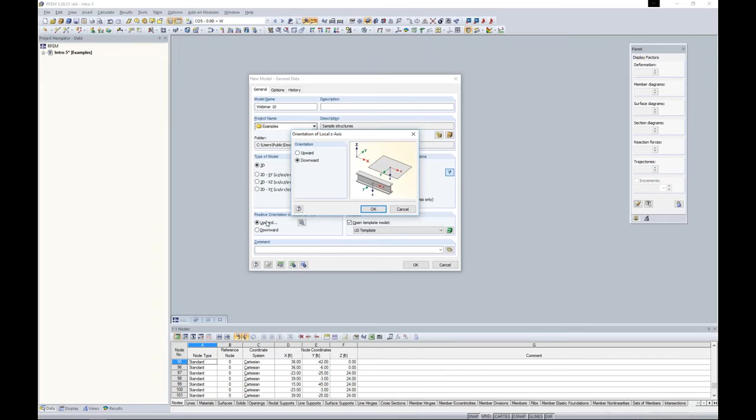The orientation of the global z-axis by default is set to upward for the United States install. That's typically what we work with here. And under this details, we'll want to make sure that our local z-axis is set to downward. This is more so important for concrete design. Otherwise, it really doesn't matter in the program. But I always suggest if you have the global z-axis upward to set this as downward for our local member axis.

Over here, we have the Create Combinations Automatically checked on. So when this is checked on, this is telling the program to automatically create these load combinations according to a specific standard that I select here in my dropdown. And this is where you can see that we have the ASCE 7 load combinations, IBC, we have the Canadian standard, as well as Eurocode and several other international standards. When I have this checked off, then I can manually create those load combinations. They won't be automatically created for me according to the specific standard.

The template model down here is important because I think it's a very beneficial option. For me, I have this US template, and this just has the grid settings set up the way that I like, maybe my units. Perhaps I have some certain materials and cross sections that I use quite often. Well, once I'm in RFEM, I can always go to File, Save as Template, and then that template will be available in this drop-down here. This is great for companies who maybe do a lot of similar structures and all start off with the basic type structure to begin with. Well, you can model that basic structure and pull that up in your template model every time and then make further changes. So now we're ready to jump into the program.

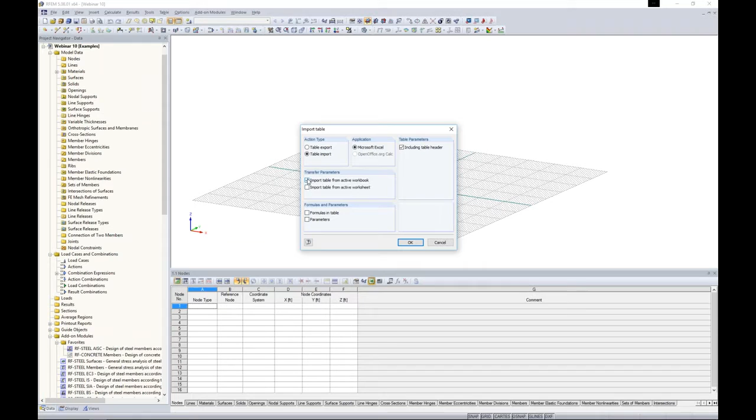So when we first open up the model here, we have our graphics view located in the center of the screen. So as we begin to draw elements within the model, this is where they will begin to appear. Down at the bottom, we have all of our tables. A lot of engineers prefer to work with the tables, and you can certainly build an entire structure within these tables as well. What is great about the tables is that we have a nice button here for export and import table directly to and from Microsoft Excel. So you can copy and paste, but realistically this is a little bit more user-friendly. For example, we can export this table for our nodes to get the basic layout with all of the correct columns. We can input our data in Microsoft Excel, maybe sort some different ways, and then we can import directly from Excel according to the active workbook and worksheet that maybe we're in the background.

A few other options that we have for modeling are, of course, all of our little tools up here, which we'll be using quite often today. We have our drop-down box up here. For example, we have all of the add-on modules listed according to the different categories, such as steel, concrete, dynamics.

We also have the Project Navigator, and the Project Navigator is just another option to input your data. We will also view our results in the Project Navigator. So this first tab down here called Data, this would be all of our input data, and here is our long list of add-on modules here.

So you can understand that we serve our customers the add-on module concept because we really want to create a software that's catered to you and your needs, rather than, hey, we need to charge you a very expensive software and you get all of these add-on modules regardless if you're going to use them or not. For example, you can see all of the different international steel codes that we have here that probably most of the time users aren't going to be utilizing. So, as I mentioned, a very long add-on module list.

The display tab really controls everything that we're viewing graphically here, including our results after we run an analysis, as well as the input data. Our views tab, it looks pretty empty right now, but as we begin to generate our structure, this will allow you as a user to create user-defined views, to view certain materials and sections quickly, rather than having to highlight and select them graphically.

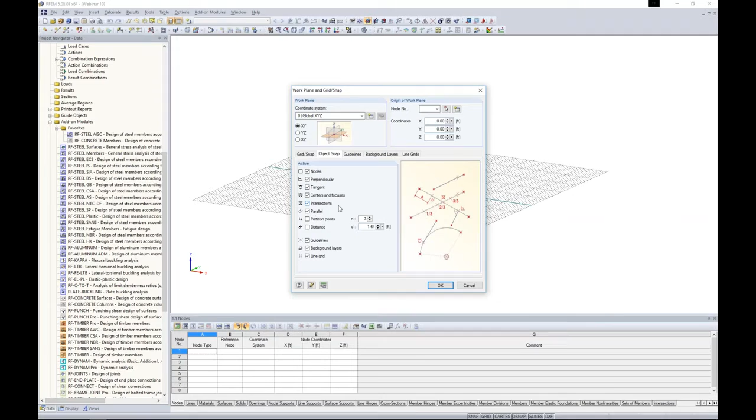And this is the reason sometimes I tell users you're almost better off just starting modeling in our program rather than importing in a DXF file, because it's easier that way, because of all these different tools that we have. But with that said, you can import DXF files too. For example, under the background layers tab is where we can import in this DXF. And what's nice about the different background layers is I can put multiple layers in here. So maybe I have a different layout for every level of a multi-story building. Well, I can go ahead and import in that DXF file at multiple elevations.

The line grids option. If I create a new line grid here, you'll notice in the background that we have our typical 2D layout of our project grid. Well, this allows us to do a 3D project grid. Down here at the bottom, you'll notice some different options that we have. For example, Cartesian, which is maybe more of a square, rectangular, 3D drawing grid. But we also have spherical, cylindrical, and inclined. So this really plays an important factor, again, for these not so simple geometries that you may have, where you have different snap points in a 3D type environment that you'd like to utilize. Well, that's where these line grids may come in handy.

Under the grid snap settings, well, this is my current grid that I'm viewing here. Default when you launch the program is this rectangular grid, but we can change this to polar if we'd like, if we're working with a circular type structure. And right now for Cartesian, I have 50 feet on either side of my origin, but I can also check this checkbox so that the project grid will actually grow with the structure, so it'll move dynamically according to the size of the model. Or if I shrink my structure down, that project grid will shrink down too, so I'm not always having to go back in here and change my settings to something bigger or smaller.

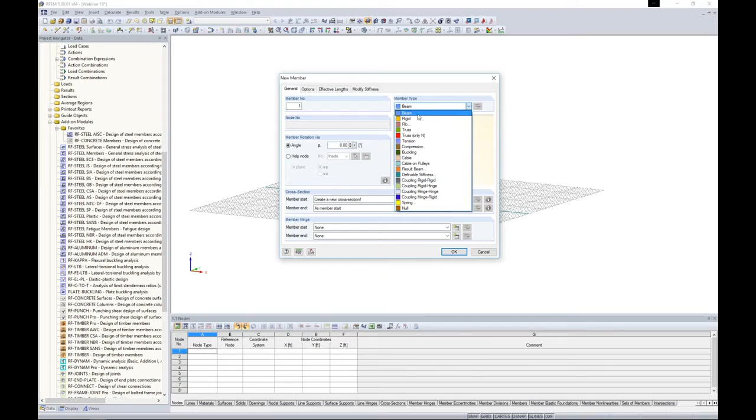And then because of our nonlinear capabilities, we can do things like cables or cables on pulleys. We can get into spring elements. So quite a few other options than just your typical application of a beam or a column.

But with that said, we will choose the member type beam and we'll create a new cross section. Launching our cross section library, you'll notice that we have our rolled sections where you'll find all of the sections from the CSA code, the AISC code, maybe aluminum sections from the ADM. These are all available in our cross section library.

But we also have these parametric thin-walled sections. We have massive sections for concrete. So you'll notice maybe in some other software you're really left with only a rectangular or circular type application for cross section.

But here we can utilize things like I sections, T sections, same with timber sections here. And we can even get into built-up type members. So we're not limited to just those sections directly from the codes, but we can really utilize a wide array of cross-sections here.

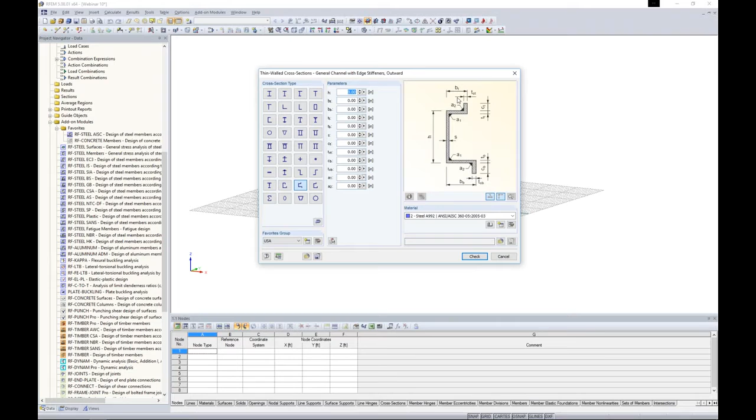For example, if I have an odd thin-walled cross-section here, all I need to do is to define my geometry, and then the program will automatically calculate the section properties for me.

We also have two standalone programs called Shape Thin and Shape Massive, and this is where you can import in a Dxf file, for example, and that will calculate the section properties for you, and then we can import them directly into RFEM. Those are standalone programs.

For today, we will go with a typical I section, and here is where we can use our filters on the left-hand side. From the first drop-down, you'll see that we have many different standards here. So that's great. If you do a lot of international projects, you'll have access to all these as well in RFEM. This is independent of any add-on modules.

Today, we'll be working with the AISC, and we want to first choose our W shape. Now, we have this long list of W shapes, which just comes directly from the AISC 14. But perhaps you use a lot of the same sections and you don't really want to scroll through this long list every time to choose your specific W shape.

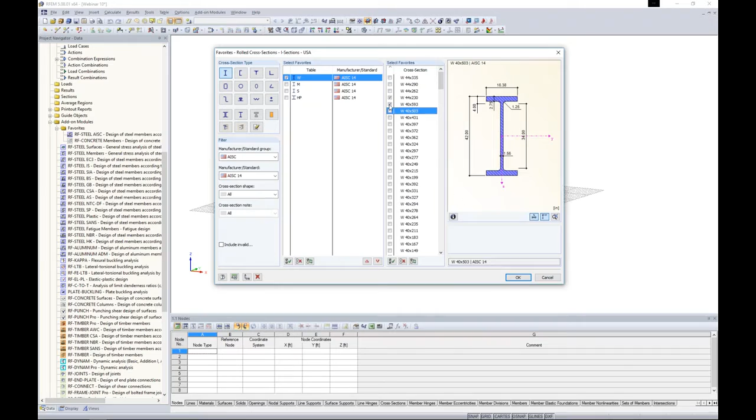Well, this is where we can utilize our favorites group. With a favorites group, and I choose my edit button here, I can simply check on or check off maybe a set of sections that I use quite often. Then when I click OK and I activate this favorites group, then I'll have these sections available from a quicker list than having to sift through everything.

For today's example, I added a couple W shapes that I know I'm going to be using for this example. So now I have quick access to them.

We can also set the material in the same dialog box. You'll notice in this drop-down menu, the default when you open up RFEM is concrete F'C 4000, and we have steel A992. So for right now, we'll just utilize the default material in the program, but later on we'll have to add in some more materials to that.

The member hinge is set at fully fixed. So right now we will not add in any member hinge, but later on we will do this as well.

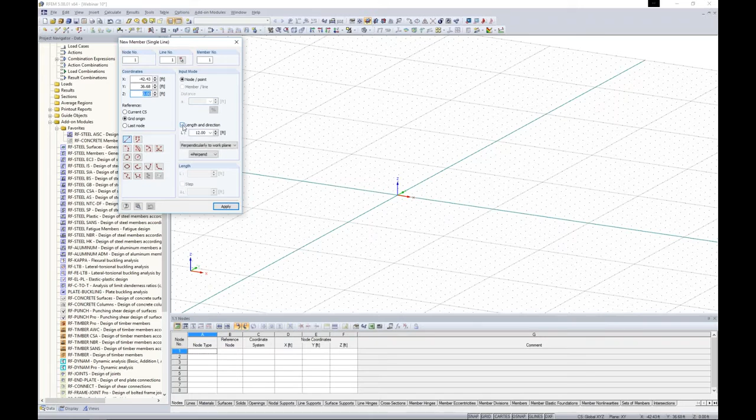So now I'm ready to draw my first member. Well, typically when drawing the member, we need to change maybe our drawing grid and maybe snap to a couple different points. But another useful feature with this dialog box when I'm drawing a new member is to simply specify the length and the direction. So I can set the length to 12 feet here, and I want to draw it perpendicular to my work plane. So my work plane is set in the global X-Y axis. All I need to do is just to click on a couple points here to draw in my first columns. And now you'll notice that the orientation is in the correct direction and my length is set correctly too with that useful feature.

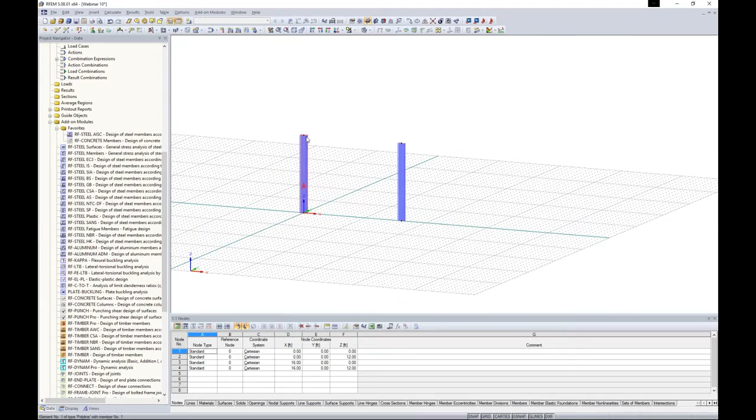The next thing to do is to draw a beam member connecting our two columns. So again, I'm just going to go to my Draw New Beam. I'm going to create a new cross-section. And once again, choosing a rolled cross-section under my favorites list, I'm going to choose a W12 by 40.

And I just noticed I used a W12 by 40 here. That's okay. I wanted to actually use, which I can click on this Edit Cross-Section, and we can edit it here to quickly change that 12 by 40 to a 10 by 33. That's my column member. So now you'll notice that my columns are 10 by 33 that I've already modeled in here. And then my new member will be a W12 by 40.

I want full fixity, so still no member end releases. And now I can snap to the top of those columns, and you'll see those green snap points pop up. That's just related to those snap features that I showed you when we first opened up the program.

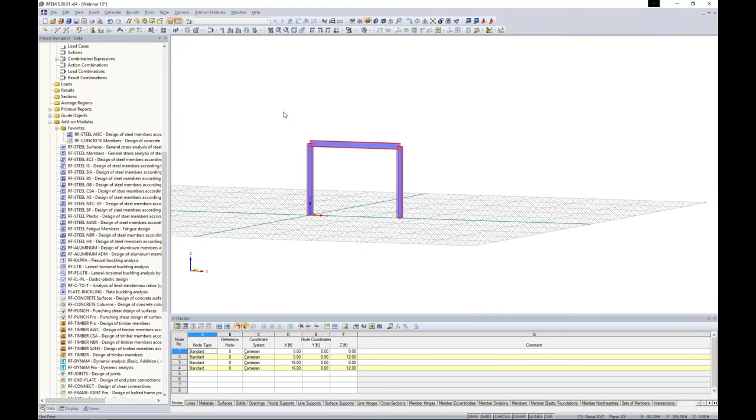So I want to create a couple copies of these. So rather than utilize the Move Copy tool, if I just highlight everything here, I hold down my Control key, then we can utilize the drag and drop feature. So we can quickly create copies of this member, additional couple stories here with just holding down the Control key, drag and dropping, and the program will do that automatically for us.

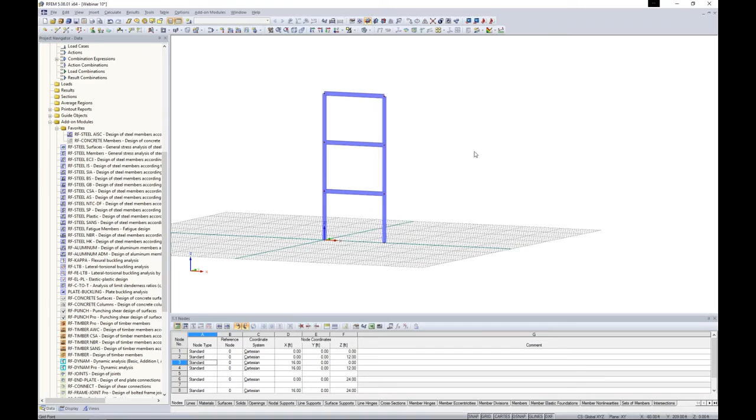Now the next thing I'd like to do is to select all of these members, and I want to right-click. Under the member option, I will create nodes on lines and intermediate nodes. So here I'm going to add 2 intermediate nodes, and you'll see that this member is still a single continuous member, and these nodes, if I double click, are of the type On Line. You can see here we have either standard or On Line, so the program knows to integrate that directly into that member.

So now that we've added those nodes, I'm going to select everything above my bottom two nodes, and I'm going to utilize the Move and Copy tool here. I'm going to create two copies in the global Y direction of 16 feet.

And we have a special feature down at the bottom of this dialog box called Edit Expanded Settings. So when I open up this additional dialog box, we can actually create lines in between our copy nodes. And even more so, we can assign a member cross-section to those lines. Every cross-section or every member is composed of a line underneath it.

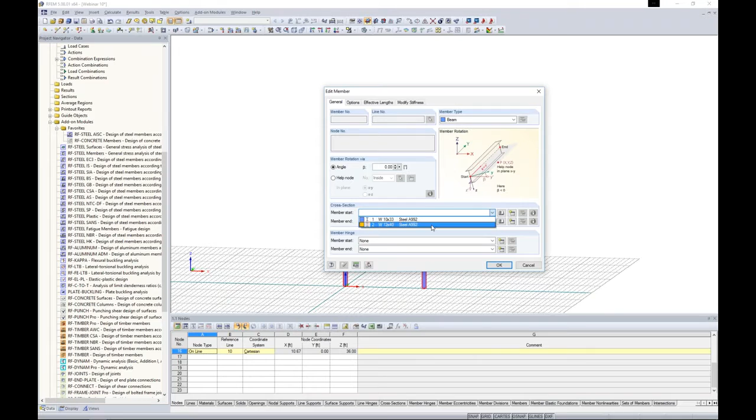So because we're creating members between these copy nodes, maybe I want to choose a cross-section from my Edit Member dialog box here. Well, I've already defined the W12 by 40 previously, so now that's available in my drop-down box here. I can click OK through all these dialog boxes, and now you'll notice that the program automatically created these beam elements between my copy nodes, so I don't have to sit there and draw in all of those additional beams, but rather utilize that function.

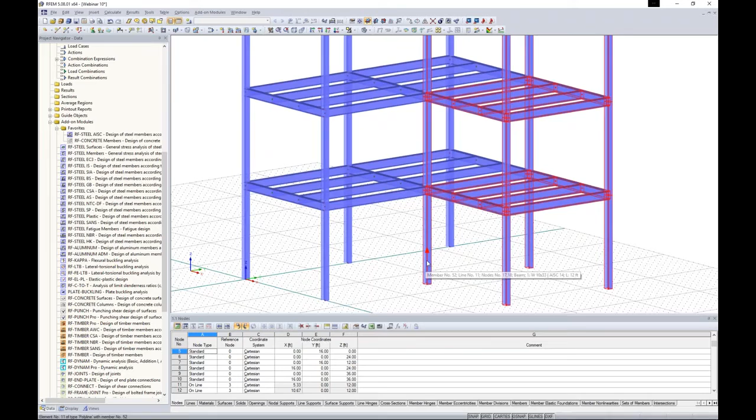So now I'm going to select this rear portion of my steel frame, and holding down my control key again, I'm going to make an additional copy right adjacent to it. And you'll notice that when I made that copy, I technically created a column on top of this column, but the program's smart enough to merge those together so we don't have any issues with duplicate members being on top of each other. So again, a nice feature of the drag and drop. Essentially, we have the basic structure for our steel structure here.

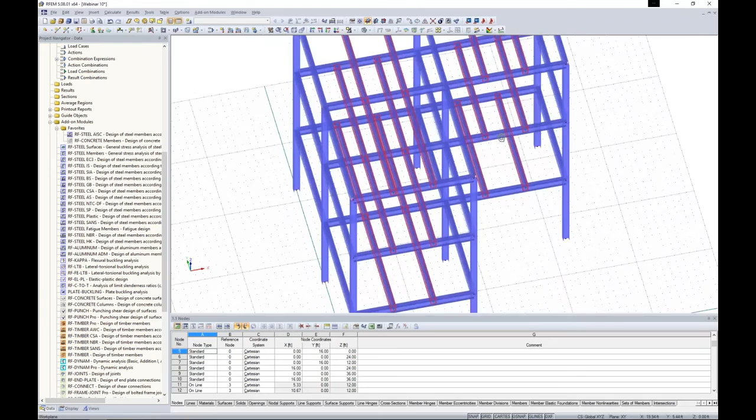Now, the next thing that maybe we'd like to do is to put this into elevation view, and I'm going to hold down my control key to select all of my intermediate beams here. And you'll notice that they are highlighted with red, and what I can do is to right-click under Member and choose Edit. Now, under the Member Hinge, this is where I'm going to create a new member hinge.

Up pops our member hinge dialog box. We have a nice picture here showing us exactly what our local axes are. So there never is any question about which axis I'm releasing in terms of translation or rotation, because this picture shows exactly how we're applying that.

So we have the usual release or fixed application for translation or rotation over here on the left. But we can also apply partial fixity, which is very common for a lot of connections. Maybe we don't have a fully fixed or fully released connection, so we can apply that spring stiffness here for partial fixity. And then again, because of the nonlinear capabilities within the program, if we want to apply a nonlinearity to this particular end release, we can. Things like slotted connections, for example. We can include partial activity, which if I go into this dialog box, this details dialog box, we can create some type of relationship manually here between the rotation and my moment.

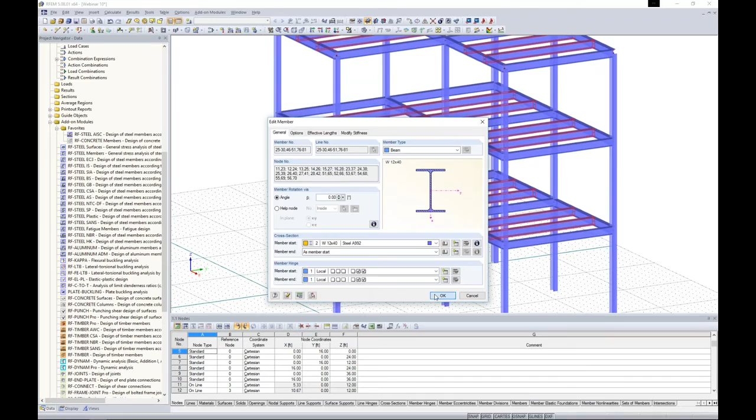Very technical if we want to get into the more advanced features of modeling, or we just leave this as none and apply a simple moment release to the ends of our members. So now for any member I model in the future, I'll have this simple moment release to apply from my drop-down box.

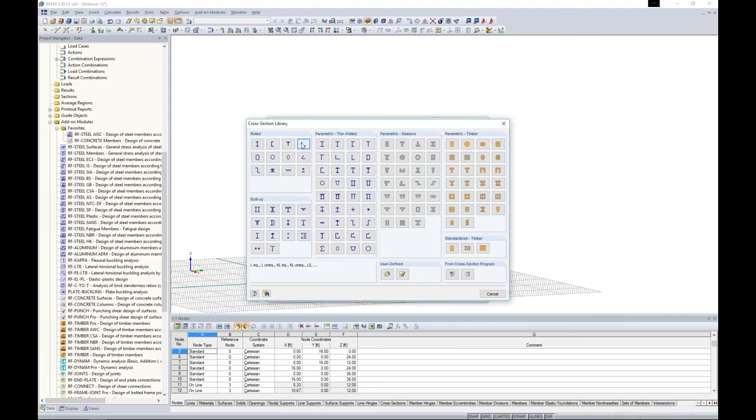The next thing to do is add a bit of lateral bracing. For this I can create a new member and go to my cross-section database to choose an angle. If I deactivate my favorites group, we have all the AISC sections, whether it's the same measurement for both legs or different lengths. Activating my favorites group, I've already added this L5x5 that I'd like to utilize.

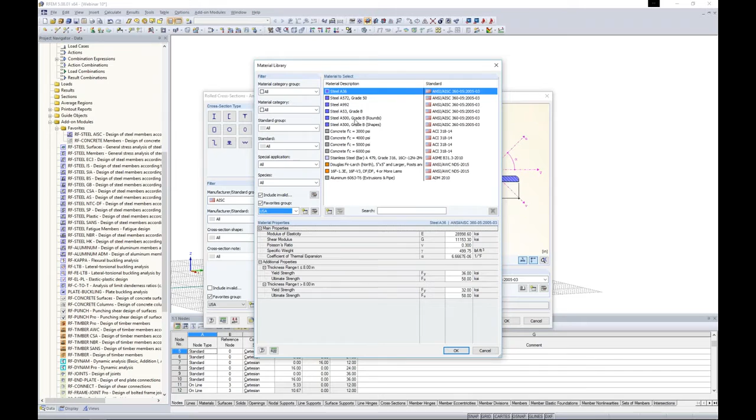Steel A992 isn't applicable, so I can quickly create a new material. This material database looks similar to our cross-section database. We have filters on the left and all the materials from AISC 360, but I can also activate my favorites group, where I have just a handful of materials I use often. Steel A36 is what I'd like to select here. I click OK, click OK.

Now for the member type, I'll set this as buckling. This means that when this member exceeds the Euler buckling load, it will be taken out of the analysis and the iterations rerun, to make sure that if a member fails, our structure is still stable. You'll notice member hinges is grayed out automatically, since we assume you'd like a full moment release for any tension-only, buckling-only, or compression-only member.

We click OK, and now we can zoom in and snap to our corner points where we'd like to add this bracing. Once I have these two braces modeled, I can use my selection tool and the drag and drop feature to add some additional bracing to the structure.

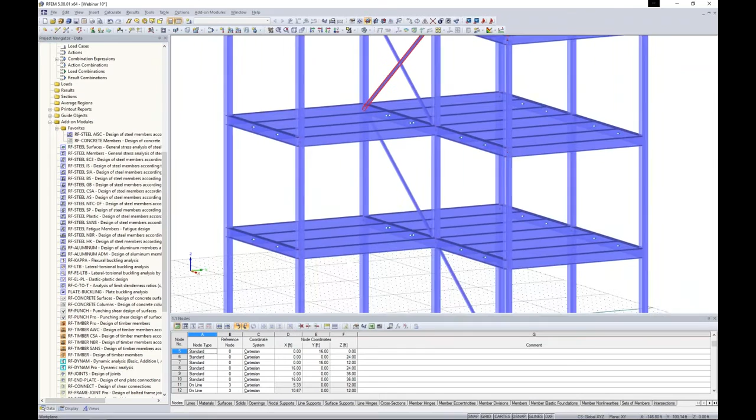Looks like we have some mistakes here, no problem, I can delete that and draw in an additional L member. All I did was not snap to the correct place, but you can see how quick it is to select your member, delete it, and recreate it using the drag and drop feature once more, which looks a little better.

Now that we're done with our steel structure, I'd like to create an adjacent concrete structure, and we'll connect those two structures once we're done with our concrete application.

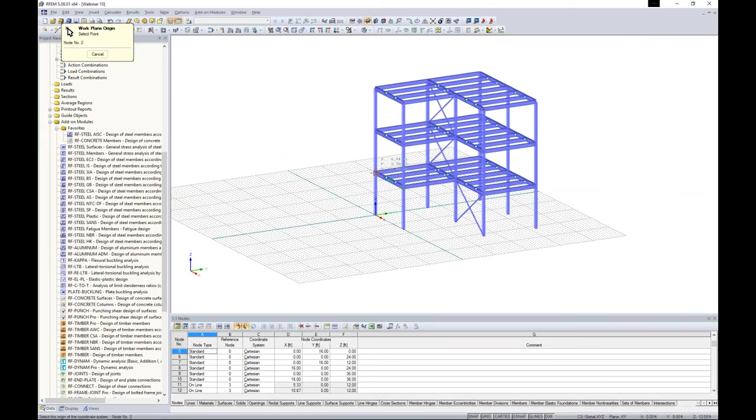Utilizing this tool to set the origin of the grid or work plane, all I need to do is select this tool and click on the corner of my structure at the first level, and my drawing grid is now placed at that level. It's nice that we don't have to go into a separate dialog box to rearrange the origin, we can do it at the click of a button. I'll turn this into elevation view.

What I'd like to do now is add some nodes to my structure. I could use this feature to add a new node and draw it graphically, or use our tables down here. To utilize the tables, I'm under table 1.1 nodes, and I'll scroll down to a place with open space. I'm going to create my first node, specifying the specific coordinates I'd like to apply.

We'll start with -23 in the X, -25 in the Y, and Z will be 12. Then simply using my down arrow, I'll create my second node at 39, -3, 12, and lastly my third node will be at 15, -45, and 12.

So just another way that I can create these nodes, as you can see them up here in my graphics view, quickly rather than utilizing the drawing feature up here. So you're probably wondering why I'm creating these odd looking nodes kind of generated out here in space. Well, the next thing I'd like to do is to create my surface element. And the surface element is going to be my elevated concrete slab at this first level.

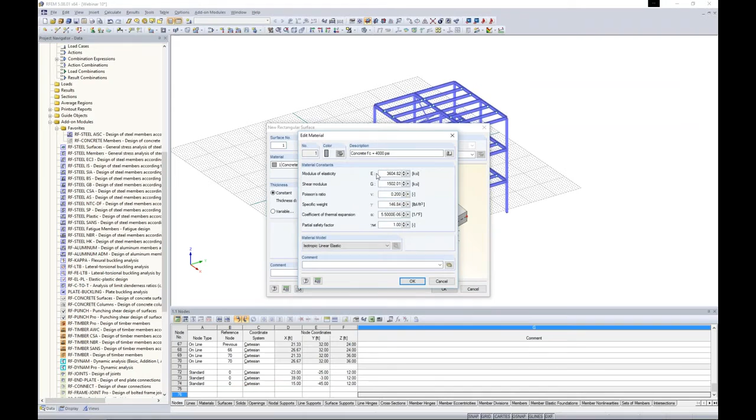And for a surface element, the first thing that it asks me is what material and thickness do you want to use? Well, 4000 PSI is default within the program, but by using my Edit Material button here and opening up my database, I'd rather choose F'C 5000. I click OK. So now you'll notice that my material has been updated. My thickness, I would like to use 10 inches here. And the stiffness is set to standard. For concrete, for example, this would be a two-way slab, just a standard thickness and stiffness in both orientations.

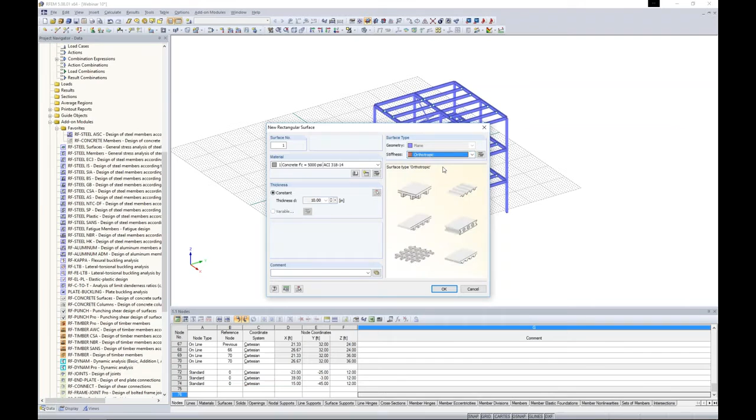But we also have orthotropic here. And when I click on the details button of orthotropic, well, this gives me a lot more options within my concrete surface element. For example, effective thickness. If I go to my effective thickness tab, I can specify two different thicknesses in both my X and Y direction for maybe a one-way slab, for example. Then I can even view my stiffness matrix for that particular surface to really see exactly what's going on in terms of the stiffness for each element.

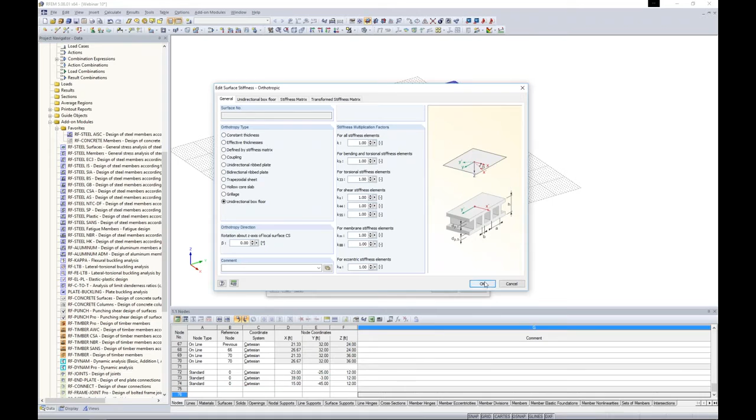We also have a few other options here, such as hollow core slab. We can simply define some of the geometric properties here, and the program will automatically determine that stiffness matrix for us. Grillage would be something like a waffle slab for a foundation maybe, and we have box floor girders here as well. For today, we will just cancel out of this and choose the standard stiffness for a two-way slab. I click OK. So the reason I was utilizing these nodes is because I only need 2 snap points here to create my surface element.

Now, I currently have 2 separate elements here. Maybe I'd like one continuous surface for my elevated slab. Well, no problem. If I click on the surface, click Delete, then I'm left with all of the external lines. I can delete this middle line. So now I can go to create my surface, but this time I'm going to select my surface using boundary lines. Again, this same dialog box is brought up, but remembers my settings from last time. I click OK, and all I do is click on those external lines to create my one continuous surface here.

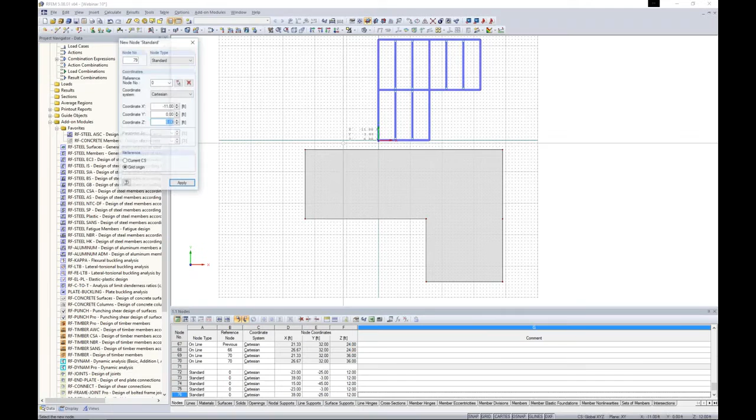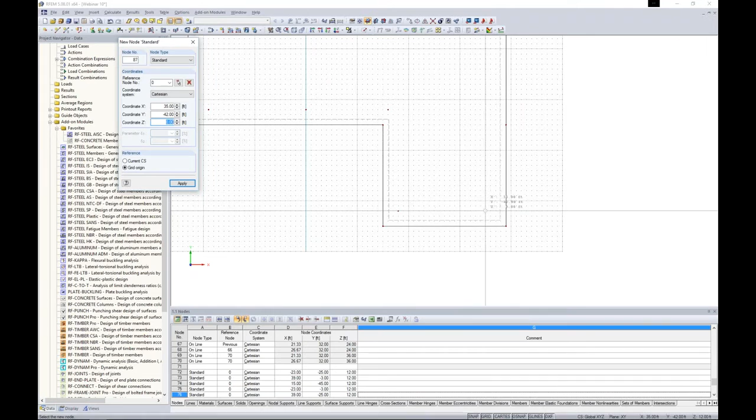Now putting this back into elevation view, we probably would like to add some columns here to support our surface. So what I'm going to do is I'm going to add some nodes, and first I'm going to change this into wireframe. It's a little bit easier to see. So all I'm doing is just clicking graphically now, rather than adding them to the table like previously, where I would like to apply some column elements. And I'm just adding them about 3 feet away from the edges here. And you'll notice that over on the right-hand side, I'm going to skip adding a column over here, and you'll see in just a minute why.

Now, these are just simple nodes, nothing too special here. So how do we quickly create some columns from these nodes? Well, I'm going to use my selection box, hold down my control key to highlight all of these nodes, and then I'm going to utilize my Move Copy tool again. This time I'm going to create one copy in the global Z direction of -12. And I also want to utilize this create members between my copy nodes, but I'd like to create a new cross-section. So here's where I go back into my cross-section library, and I'm going to utilize a parametric massive section. So here is where we specify our basic geometry of 15 inches by 15 inches.

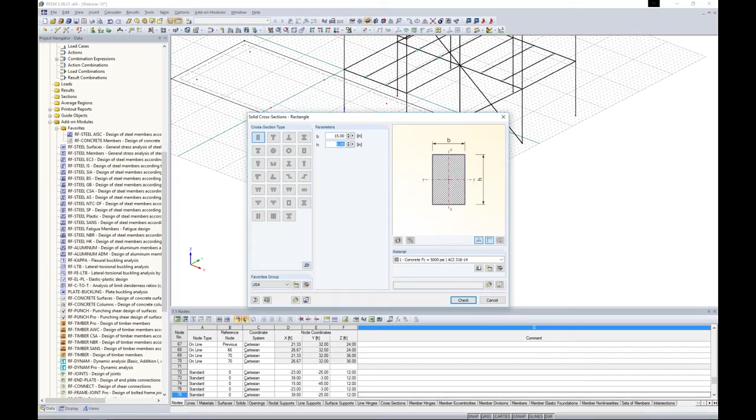I can click my info button to get all of my section properties here that the program automatically calculates. Concrete f'c 5000 is good. I'd like full fixity here. I click OK, and I click OK through all these dialog boxes.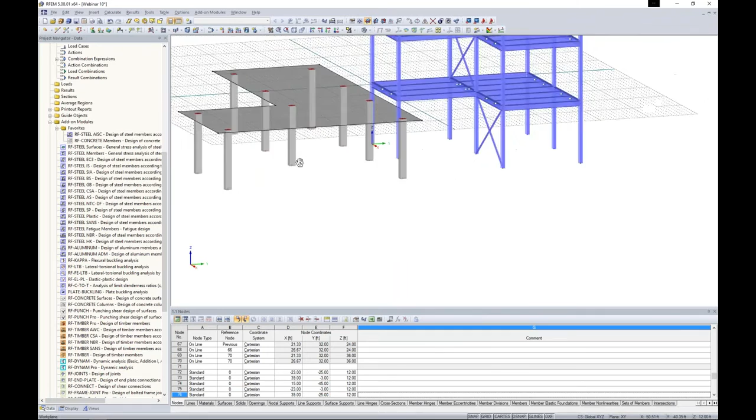Now turning this back into the rendered version, you'll see that my columns were automatically created using that Move and Copy tool. So the next thing I'd like to do is to maybe create a second floor. Well, I can hold down my control key, use my drag and drop feature once again, and now I have my second floor here. The reason that I skipped the column over on this side is because maybe I'd like to create a rib type beam underneath my slab here.

Well, the first thing I'm going to do is to draw a line element. Now, a line element is not a member. We can create a member from a line element, but it's just a simple line. So here I'm going to snap from the top of my column and also on my first level here.

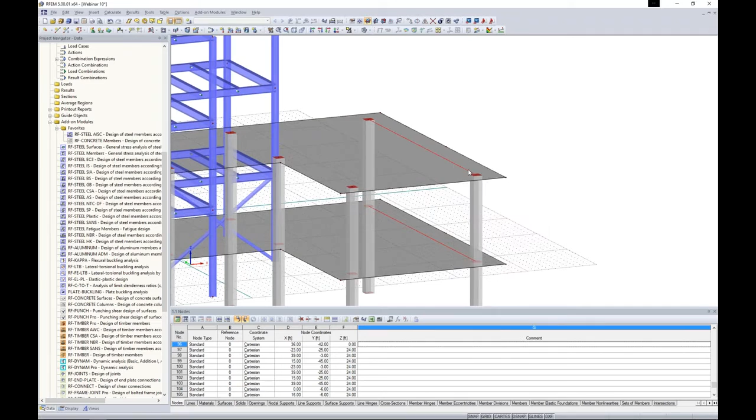Now, what do I want to do with these lines? Well, if I hold down the control key and select both of them, I can right-click to edit the line. And like I mentioned, this is just another way to create a member, but every line or every member is created from a line. So we have a member tab here where I can select the option available, and I will create a new member type, but this time it will be type rib.

Now I need to go into my detail settings here, and the first thing that the program's asking for is where is the alignment of this rib member in comparison to the surface element? Well, I'd like to move it onto the local positive Z side of the surface, which you can see my little picture updates here.

And we can actually take into account for both the analysis and design portion of this rib some effective widths. We can either do this automatically with L/6 or L/8, or we can manually enter them in. So for side 1, I'd like to choose L/8, which will be this side over here. For side 2, I'm going to choose manually 3 feet, and that's because I'm at the edge of my slab element here. I click OK.

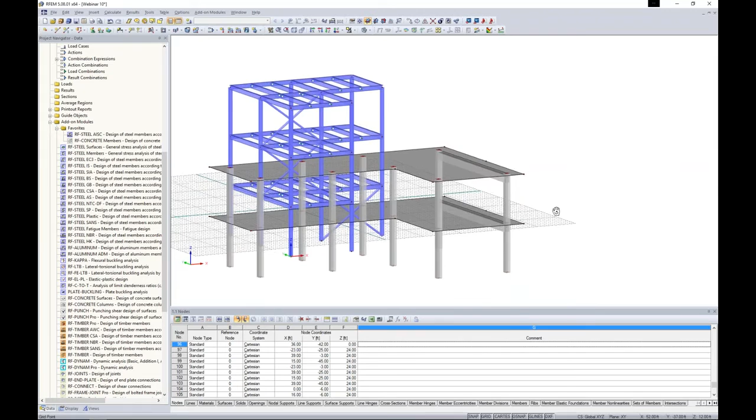No member hinges will be applied here. And what I do want to do is to create a new cross-section quickly with my parametric massive shapes. And this time it will be a 15 by 22 inch deep member. Click OK. And now you can see that that beam member was dropped down below the surface, but it will be taken into account with the effective width of the surface itself. Now, all the program's doing is dropping little rigid links along the length of the member at every finite element for the surface.

Okay, so one other thing we need to do before loading our structure is we need to quickly apply some nodal support. So I have a quick button here to apply a new nodal support, but I can also utilize my project navigator here. You'll notice here's my cross sections within the program. Here's my surfaces. Here's my material. So all of your input data is available here as well.

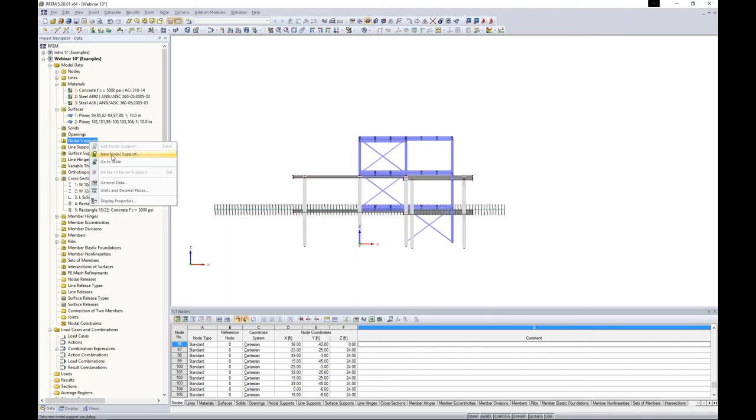So under the option Nodal Supports, I'm going to right-click and choose New Nodal Support. Again, this should look similar to the member end releases that we utilized before. We can either set this as fully free or fully fixed in terms of translation and rotation. We can also do partial fixity. And then the nonlinearity capabilities of the program will allow us to take into account things like partial activity. Maybe we have a sliding or we have friction that we'd like to take into account. All of that can be done.

For us, we will just choose a fully rigid connection, and then I can choose the bottom of my structure and the nodes graphically, click OK. I'll turn off my grid settings down here at the bottom, and now I have my structure with the nodal supports applied.

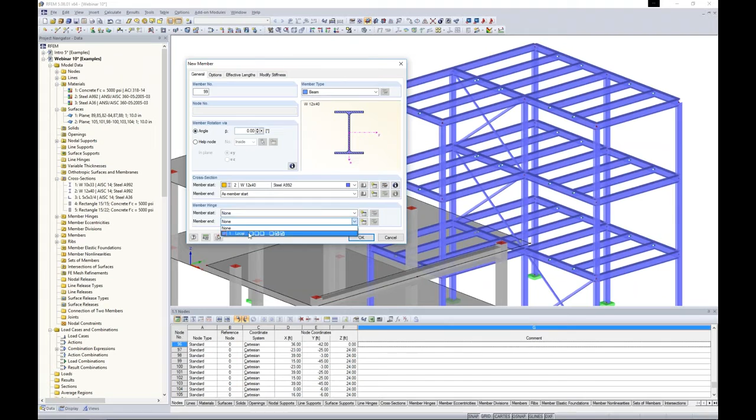One other thing we'd like to do is to quickly connect our two structures here. We have the member type, we'll choose beam here and selecting a W12x40. The member start, I would like it to be fully fixed, but the member end, I want to apply that moment release. I click OK, and then you'll notice that I have those snap points, and automatically the program recognizes what is perpendicular to the surface here.

So I don't even necessarily have to create a new node, but I can utilize those snap points. Okay, so the next thing that we'd like to do now that we've automatically created the generation of our structure is to apply some loads.

So up here under new load case, we can create our first load case and give it a description of dead load. Now the action category is important because this tells the program how to apply it to the different load combinations according to the ASCE 7. You'll notice that for dead load, self-weight is automatically checked on. So this is how we can take into account the self-weight of the structure automatically based on the element's densities.

We create our second load case. This one we will call it live and give it an action category of live here. You'll notice self-weight is checked off, otherwise we'd be accounting for it twice. And lastly, we will create a third called wind and apply it to the action category of wind.

Under combination expressions here, the program is going to create both LRFD and ASD combinations. I can click this little info button if I'm curious to see exactly what combinations are applicable from section 2.3 of the ASCE 7. Under load combinations, this is where my load combinations will actually be generated for both LRFD and ASD. But what's nice is you'll notice that only the applicable load cases are applied here.

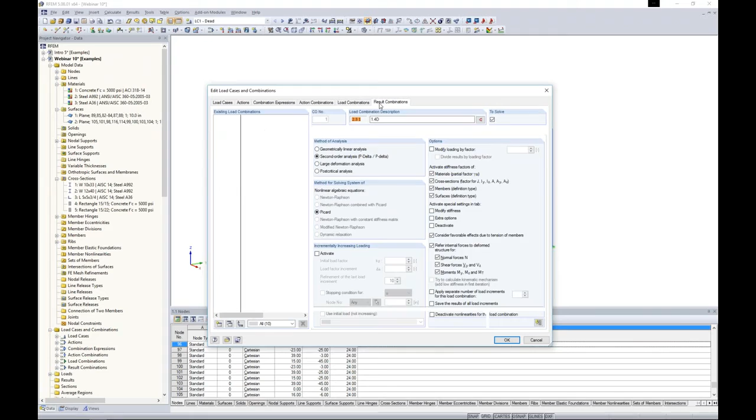Result combination is nothing more than an envelope solution for all of our LRFD combinations and ASD combinations that was created automatically. So now that we have our load combinations generated, I'm going to use my drop-down box up here to make sure I'm under dead load. So now any loads that I apply on the model will be under that load category.

The first thing to do is to apply a new surface load. And under surface load, you'll notice that we have the load type force, of course, what we'd expect, but we also have things like temperatures and axial strains, even rotary motions. Then you need to specify the load direction. We will stick with the global ZL direction. You'll notice as I switch through these different options here, my little picture updates to show me exactly how I'm applying this load to the structure.

We will apply a magnitude of negative 0.1 kips per square foot. I click OK. All I have to do is to click on those single surface elements to apply that dead load to my elevated slabs.

In a similar manner, we would like to apply a dead load to our member elements here, and we could certainly apply a single member load in kips per foot on each one of these, but rather I'd have the program determine what the tributary areas are for each member and do that automatically, which we do have a feature for. So under Tools, Generate Loads, you'll see here that we do have snow loads and wind loads, for example, according to the different standards such as ASCE 7.

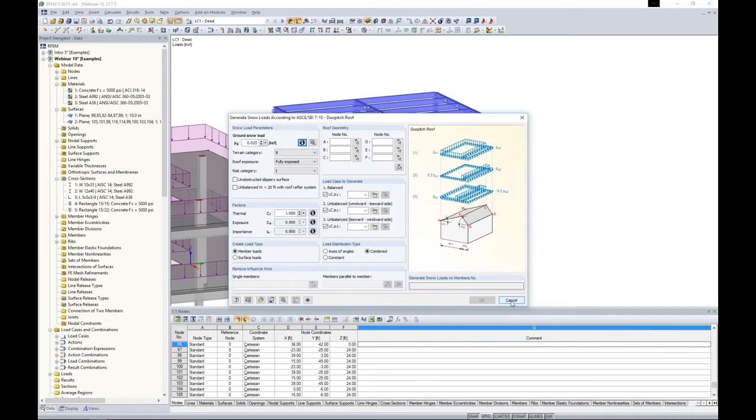For today, as I mentioned, we don't have a structure like that. We have a little bit more odd geometry. So under Tools, Generate Loads, we'll choose this option from Area Loads via a member. Now, similar to what we saw with the surface load, we need to give it the area load direction, and the global ZL direction is what we'll choose. And the magnitude will be negative 0.1 kips per square foot.

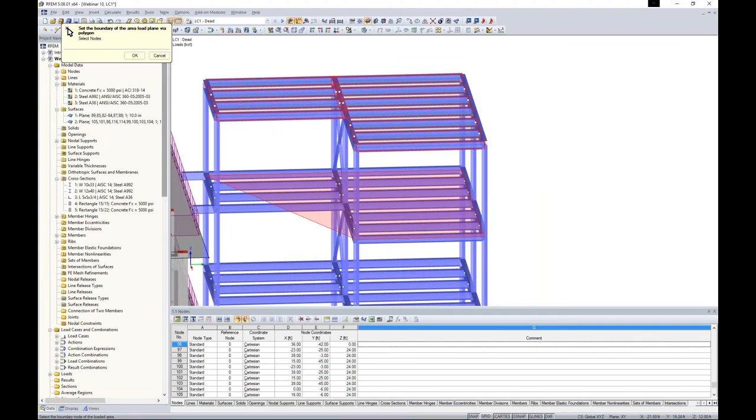What I'd like to do now is to choose my corner nodes. So what I'm going to do is I'm just going to choose my corner nodes where I'd like to apply this area load. And there's a couple nice features about this. Number one is that it doesn't have to be a typical rectangular application, but you'll notice that I'm actually choosing a polyline application for an odd geometry, for example. And number two is that I'm applying it to different levels here and to closing off each plane individually.

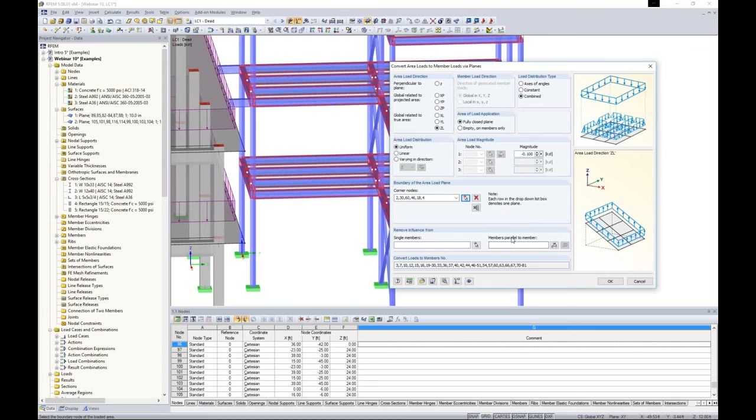So I can apply this to not only my first level, but also the second and third at the same time. So all the red members are highlighted, which this area load will be applied. But now I can exclude members parallel to a certain member. So I can graphically choose, let's say, for example, this member here. I click OK. The program will automatically create this area load, which we can see by this faint gray line here.

And maybe I'm interested to see how this load was applied to each member. Well, I can right-click, display separately, to see that I'm only applying it to these members in the global Y direction, and I can view the magnitude by zooming in here as well. So just a quick application so the program can automatically figure out these tributary areas.

In the same sense, I'm going to apply a live load, again with a surface load. And all I'm going to do is to change the magnitude to negative 0.05 kips per square foot. Click on my two surfaces. Under Tools, Generate Loads from Area Loads via Planes. The program remembers all of my settings that I just previously set for my dead load.

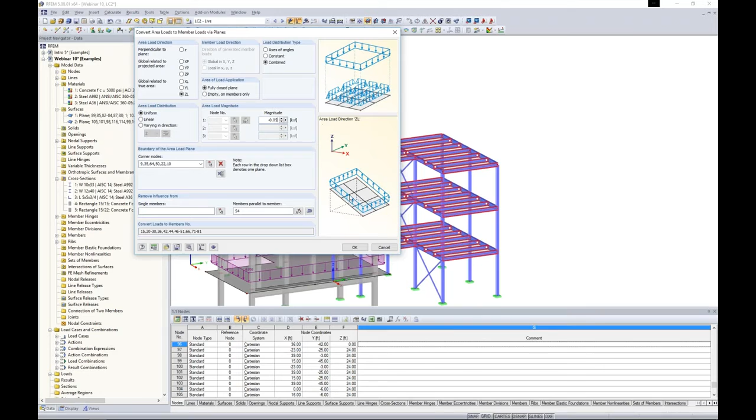So all I have to do here is to select negative 0.05 to change my magnitude. I click OK. And all of those loads are automatically generated for me. I can right-click to display in a little bit of a nicer view here if I'd like.

Lastly, we want to apply some lateral loads here according to wind loads. The first thing I'm going to do is choose a new line load. A line load is different than a member load, which is right next to it, because a line load would be applied to a surface element here where we don't have a member at this location, but rather we have a line element.

Again, this should look familiar to what we've seen, maybe a little bit different view, but all we're doing is applying a load direction in the global Y direction this time and giving it a magnitude of 0.3 kips per foot. Then all I have to do is just to click on these different line elements to apply that lateral load.

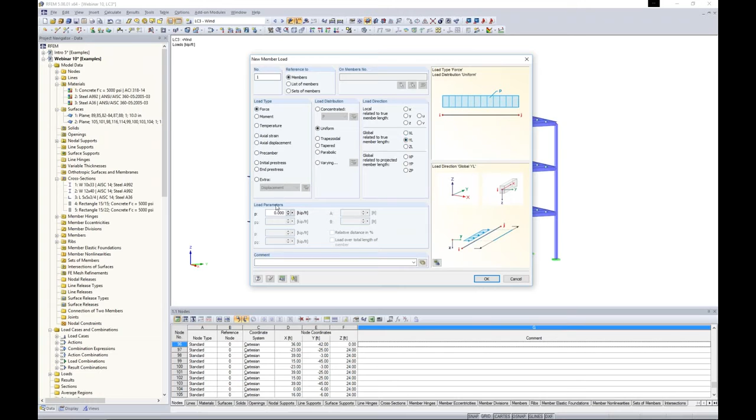Maybe for my members up here, I'd like to apply a member load though. So right next to line load, I choose member load. And again, a few more options here in terms of temperatures and axial strains. For this, we'll stick with the global Y direction and apply this as 0.3 kips per foot. I click OK, and I click on this single member.

So lastly, for our wind load, we probably would like to apply member loads in a similar fashion to these vertical columns as well as our steel structure and our concrete structure. Going back to member load, this is where we can utilize maybe the trapezoidal function. And you'll notice here that we have the tapered option. We can even get into parabolic type load application.

And in most of our loads that we manually apply, we have this varying option. And if I go into the details of this, you'll notice I can import directly from Excel multiple locations along the X length of my member as well as the load magnitude. So just for more complex applications. For today we'll stick with this trapezoidal load. P1 will be 0.1 kips per foot, P2 will be 0.3, and I'd like it over the full length of the member. So now I can just click on my members here.

Now you'll notice as I'm clicking on these members that typically with wind loads, I would like to apply a higher magnitude at the top and lower magnitude at the bottom. Well, that's fine for over here, but it looks like our concrete members are opposite. So I could easily double click on these member loads and switch them around, but you'll notice that my columns start by the big red arrow here at the top and finish down at the bottom, whereas my steel are opposite of this.

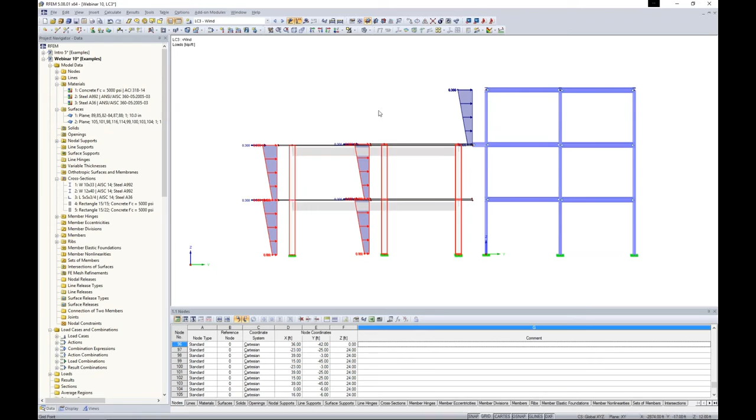So maybe I'd like them in the same orientation. Well, for this, I can highlight all of my columns. I can right click and I can choose under member here to reverse the member orientation, and now my loads look more similar to my steel. So that's just another option you have if you want to quickly reverse the I and J ends of your members.

Now with that said, you can see that all of our different load combinations with the correct load factors will be applied graphically here as we scroll through the different applications. And now I'm ready to run an analysis. The first thing I want to point out when we run an analysis is under Calculate FE Mesh Settings, the global mesh settings are set at 1 foot. I think that this is fine for maybe an elevated slab, but you can always change these to something smaller as well. Now we do have FE Mesh Refinements that you can create about a particular node or line within the element. It's a little bit more advanced feature that we won't get into today.

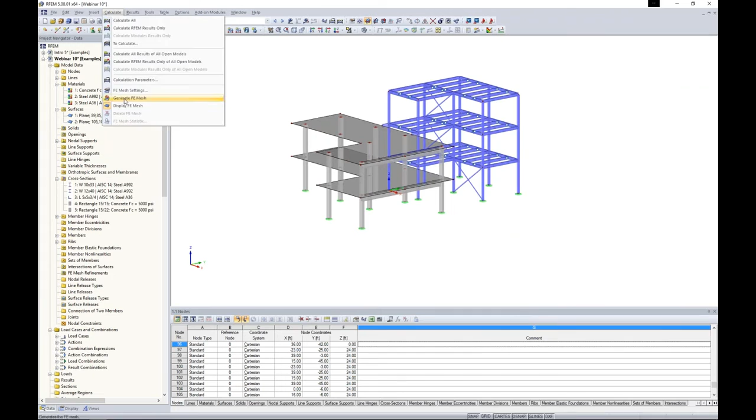But if I go to Calculate, Generate FE Mesh, and I turn this into wireframe view, you'll notice that everything was automatically created for me. I never have to worry about tying these nodes into elements, making sure that my FE Mesh is submeshed further. The program does all this automatically. If I were to make any changes within the model, move these columns around, everything will be updated accordingly.

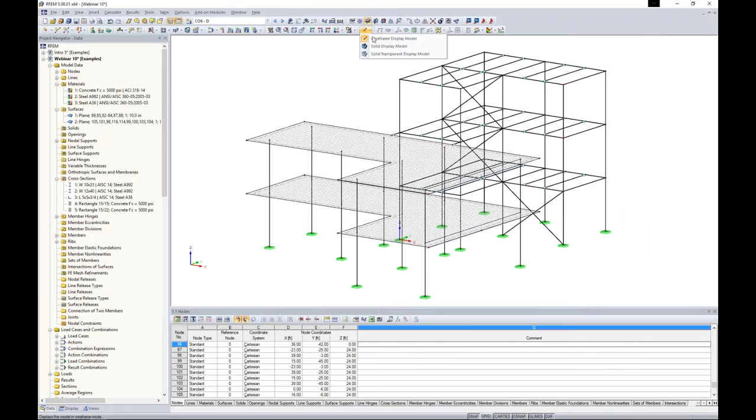Okay, so we're now ready to run an analysis, and I can simply go to Calculate, Calculate All. So now the program is running through all of my different load cases, load combinations, and result combinations. It is doing a nonlinear analysis, and the reason why is because we want to take into account both big P delta and P little delta. We also get a little diagram here showing us our iterations versus our max displacement. If you notice that this is starting to just increase and increase and increase, then we probably have some type of instability within the program.

After the analysis is run, then the program automatically jumps to our results tab available in our project navigator. So here is where we can graphically view all of our different deformations, for example, in the different translation and rotation directions. Under the display tab and under the results tree here is where we control everything that we're viewing graphically here for our results. So you can feel free to change this around if you'd like, if you don't like the look of some of it.

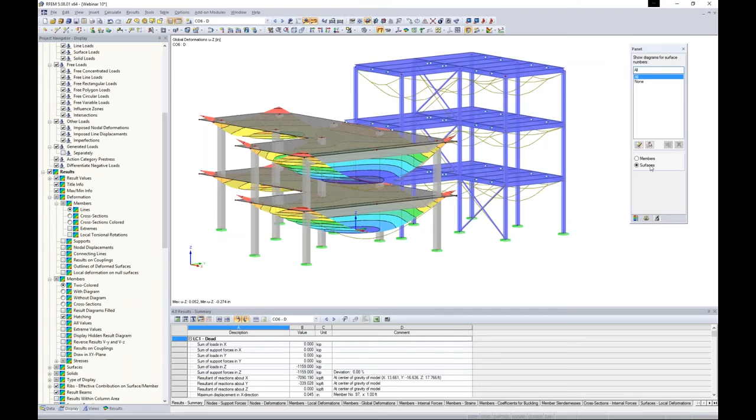Back under the results tab, we also have the options to view members. For example, maybe I want to take a look at this column line here and I can create a specific visibility. Well, when I'm looking at my members tree, I can activate maybe my axial loads within my columns I'm interested in. We can take a look at moments here, shear forces, everything that's of interest probably for our design purposes.

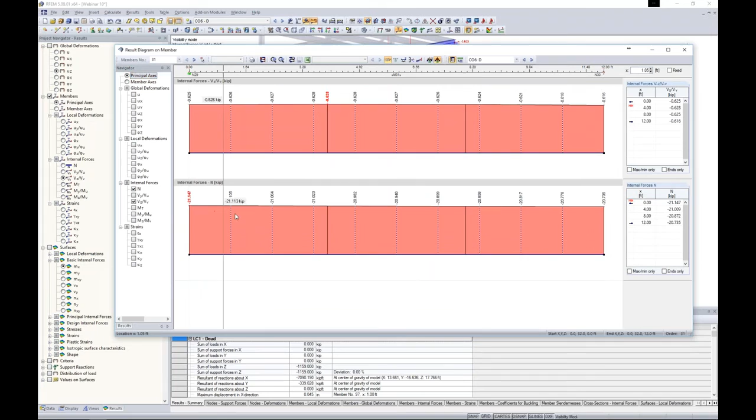I can always right-click on any one of these and choose Results Diagram. And when I choose Results Diagram, I can turn on those same diagrams, but this will just give me a little bit more of a useful look at the magnitudes along the length of my members for my internal forces. We can also scroll between the different load combinations here, and we can even change members with this drop-down box.

And lastly, we have our surfaces available. If I cancel out this visibility mode, and I zoom out, let me turn off my members. Well, for our internal forces here, these are important for concrete design purposes. We give these to you in terms of contours. We also have section cuts, but again, I won't get into the details of that. But we can view our surfaces here, such as MX, MY, MXY, that are important when we're looking at reinforcement design of the surface.

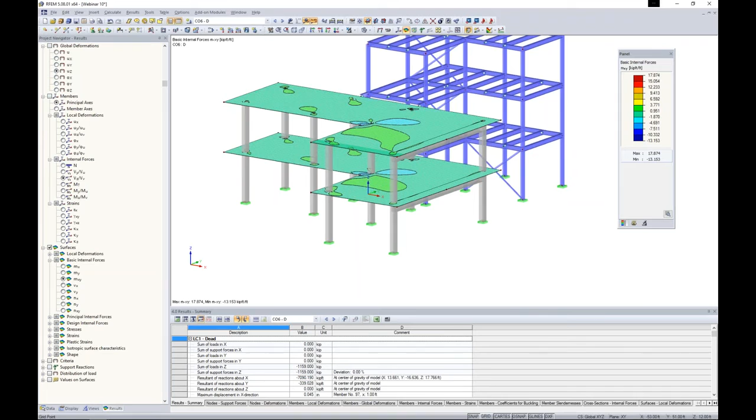So with that said, everything that we've done up until now has been in RFEM alone. So this is the analysis portion. And I want to make the clear distinction that I want to jump into one of the add-on modules. So back under the Data tab, now I'm deciding, okay, now that I have all my internal forces, I'd really like to take a look at design per the AISC. So I'm going to launch my add-on module, STEEL AISC. And you'll notice the add-on module is nothing more than a simple dialog box within RFEM.

So all of my materials, my cross-sections, my geometries, my member lengths are all brought into this add-on module, including our load combinations here. All I'm doing is specifying a little bit more information related to that specific standard to do my code check. So the first thing I do is I'm going to use my drop-down to select LRFD 2010.

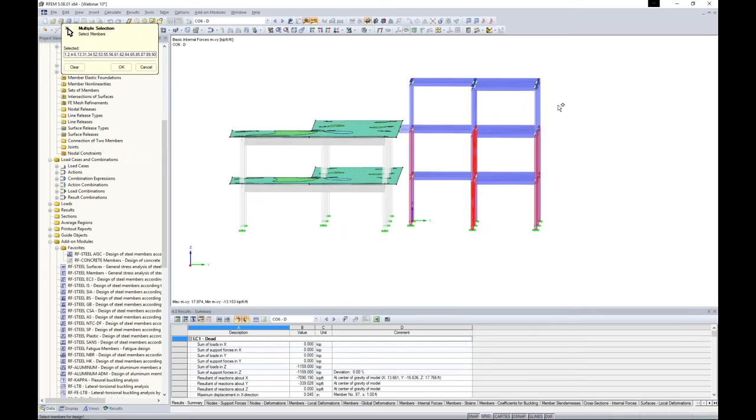My ultimate limit state design, maybe I'd like to select all of my LRFD load combinations. Serviceability, I can select my ASD load combinations. My members, I select graphically for design, which I can do by selecting all of my vertical column members. And maybe I'm not so interested in these braces, so I'd like to exclude them from my analysis for now. And then I just simply work down my list here.

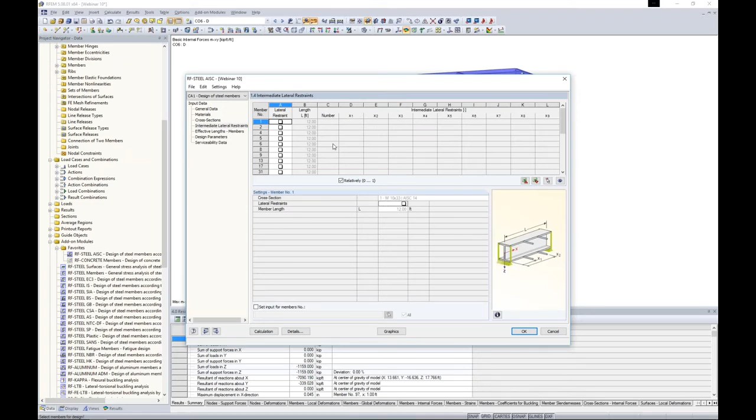Going down to materials, steel A992 was brought into the add-on module. Cross sections, same thing, my W10 by 33 is available. Intermediate lateral restraints, this is just if we have any top or bottom flange bracing along our member length, we could specify that here. Design parameters, effective lengths is going to be buckling about our strong or weak axis with our unbraced member lengths, which default to the full member length. We also have torsional buckling and lateral torsional buckling that we can take into account.

Design parameters, just a few more variables that are in regards to the AISC 360, such as the C sub B factor. Again, most of the stuff you maybe just leave at default and what the program calculates for you. Lastly, serviceability data. We can check deflections according to a specific deflection ratio.

Under my details tab is where I have my limiting deflection set at L over 360 for simply supported members and L over 180 for cantilever members. I can adjust this equation or this ratio if necessary.

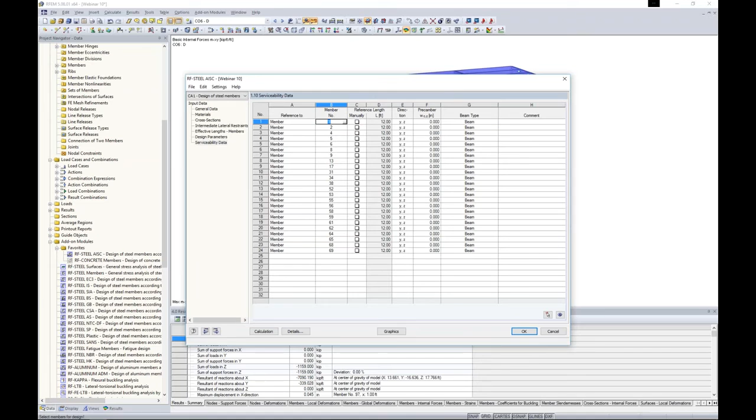And here, all I do is again select my members, and I'm going to select all of my columns graphically. And we'll have to exclude the braces because I did select them within my selection box, but I don't want to check the serviceability for them right now. And the full member length is default here for the reference length. I can add in a pre-camber if I'd like to. And then I'm ready to run my calculation.

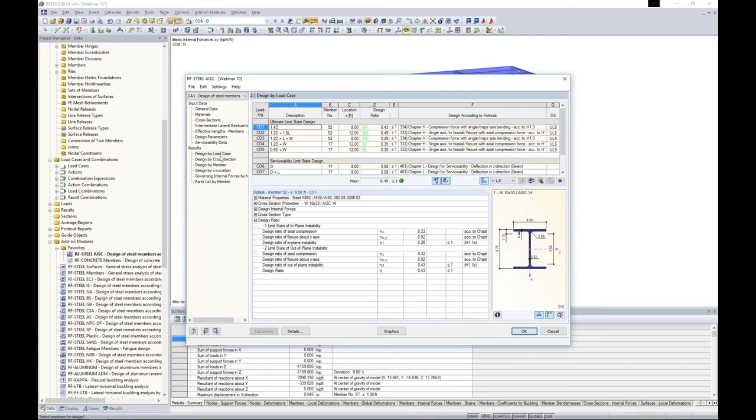You'll see that this solves within a split second, and that's because the internal forces have already been solved for within RFEM. All it's doing is taking those internal forces into this add-on module and applying the code checks to those specific members. So our results are available here, designed by load case, designed by cross-section. We can even view the design by member.

What's nice is that as I scroll through this table here in my add-on module, you'll notice that I'm synced up to the graphics view within RFEM. Even this big red arrow tells me exactly where my internal forces that are controlling for this specific code check are.

One very powerful feature, which I always point out almost every webinar, because I think that this is a little bit more unique to our program, is that we don't just give you our controlling code check here with our big green smiley face because we are under 1.0, but we give you the code check that is applicable throughout the entire AISC for that specific member. So you'll see Chapter E, Chapter F, Chapter G, all of those checks will be given to you here.

And even more so, we give you all of the variables that go into play for this, as well as the variable references directly to the code. So again, just very powerful in us trying to be as transparent to you as possible where your numbers are coming from.

We can also view everything graphically here, and when we're in the AISC module, which you can see from our drop-down list, RF-STEEL AISC, we can view either the ultimate or serviceability cases graphically if we choose to do so. So that's really all I wanted to show you in terms of the steel design.

Again, I know I flew through this. I did a complete one-hour webinar devoted to only steel design and this add-on module that if you'd like to see that in much more detail, I want to reference you again to our YouTube channel.

In a similar sense, I want to launch our RF concrete members to just show you real quick maybe what concrete member design would look like. You'll notice that the add-on module looks pretty familiar. That's the great thing about our program is a lot of these add-on modules look very similar.

Once you learn one, all the rest are pretty intuitive to work through. The first thing we do is select our standard ACI 318 from the drop-down. For strength limit state, I'll select my LRFD load combinations. For serviceability limit state, I'll select my ASD load combinations. Then I just move slowly down the list.

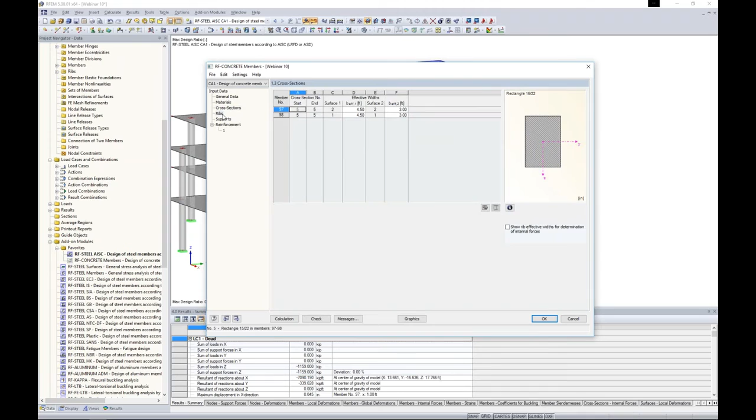Materials, F'C 5000 is applicable. You'll notice the steel options are red because they cannot be applied in a concrete design add-on module—that makes sense. Cross sections, same thing: the only ones applicable are our rectangular concrete sections. The program is smart enough to recognize we have some rib members, and it will take into account the effective widths for design purposes, which we'll see in just a moment.

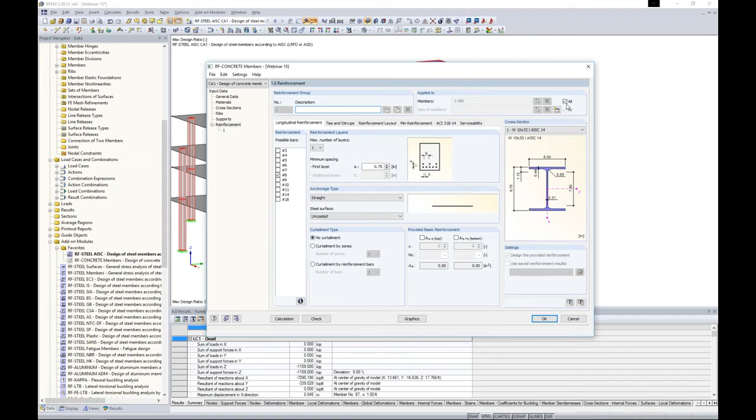Under the reinforcement tab, this is where we specify the different longitudinal and shear reinforcement factors. You'll notice all members are being designed, but we have a steel section pulled up in our concrete add-on module, which would probably give us an error if we tried to design it. So instead, I'll graphically choose just my two rib members. I click OK, and now here are our rib members shown in the preview box.

Working from left to right, I want to choose my longitudinal reinforcement—maybe number 8s and number 9s. I can choose maybe two layers for my longitudinal reinforcement if needed. The anchorage type we can change to straight or hook. For bend, you'll notice the picture updates according to whatever selection we choose. Ties and stirrups, same concept—maybe I'll choose number 4s. We can also control the spacing of the shear reinforcement down here at the bottom.

The reinforcement layout is just cover spacings, which the picture updates to show exactly what variable you're setting within this entry on the left for our cover. The reinforcement layout has some different options, whether we want an optimized distribution or maybe we want to set a ratio of our top reinforcement versus our bottom reinforcement.

An important thing to know is this is the design internal forces, so right now everything is checked. The reinforcement will be designed for axial forces, shear forces, moments, as well as torsion. We can always uncheck one of these if we don't want to take them into account. For minimum reinforcement, if we'd like to put in a minimum area, we can do so here. Otherwise, with these two checkboxes checked, the program will refer to the ACI standard and put in the minimum reinforcement the standard calls for.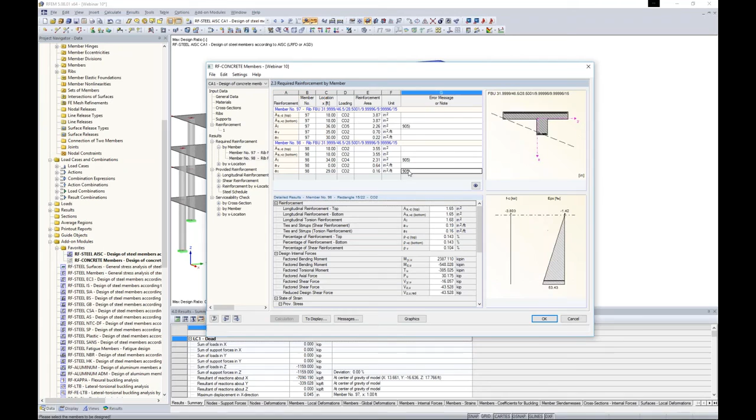We can always click on messages to see those code references of exactly what these little notes within the program are trying to tell us.

Then we'll get provided reinforcement. This is nice because required reinforcement is okay, this is just an arbitrary number, but we'd like to see the applicable bars within the design to see how we're going to meet those required reinforcement. So we have both longitudinal reinforcement and we can see our shear reinforcement here.

Now we have pretty close, tight spacing here of our shear. That's probably because of some torsion effects, which we could always go back and choose to uncheck for our internal force design.

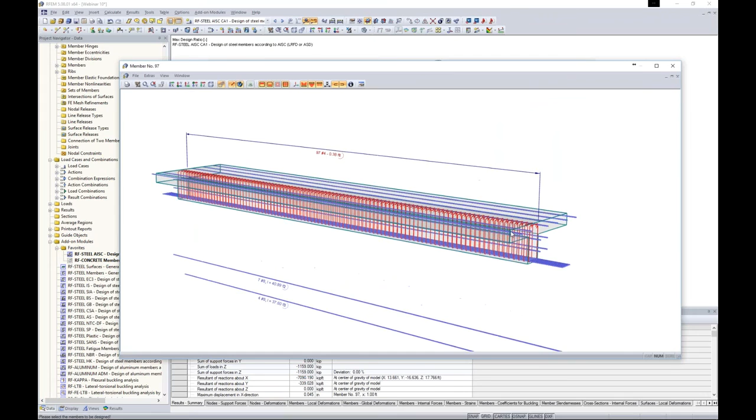Now, if I choose 3D rendering here, this will just give me a nicer view of my reinforcement throughout the member. Maybe I'm not happy with one of these. Well, I can always double click on one of these reinforcement settings and adjust my bars here, including the location of the spacings along the bar length. So very, very powerful when it comes to our reinforcement for concrete.

Okay, so exiting out of this 3D view, we also have our serviceability check. This is more so in table format. Looks like we're a little bit overstressed, or not overstressed, but our limiting crack or spacing for our torsional reinforcement is exceeding the capacity here.

Well, this is a good example here of a live webinar. It was passing before, but it looks like now we aren't passing, so maybe we'd want to go back and address some of the spacings for our longitudinal and shear reinforcement to meet those code standards. But again, this will just show you when you aren't passing and how to better change around the input data.

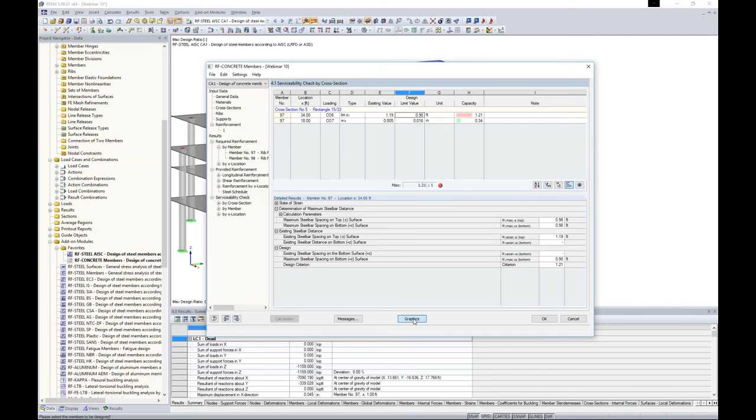So for now, we'll forego this and jump into our graphics view, which I just lastly want to show you that, again, we're still within this RF concrete members here, and this means we're still looking at the add-on module. We're just viewing graphically some of our results.

So here's where our required reinforcement is. And you'll notice that maybe I could create a little section view of my two members here that I designed for. And I have my AS top required, my AS bottom required.

Now maybe I want to compare that to my provided reinforcement. So for example, I can turn on my AS bottom, which is this nice diagram here given in inches squared, and I'd like to see how my provided meets the required. Well, you can see that it looks like we're well over the required reinforcement ratio here.

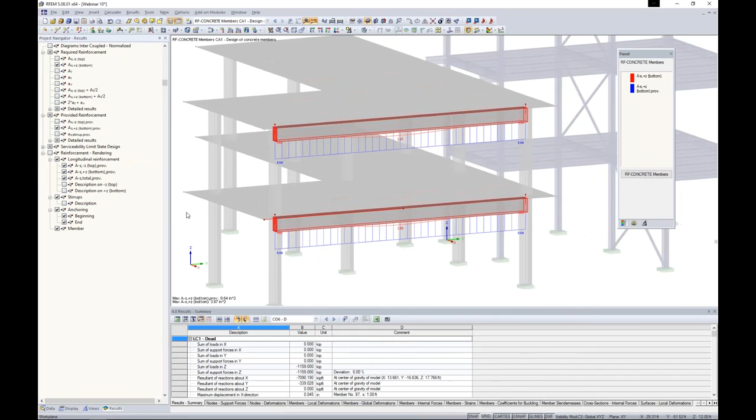So you can view everything graphically. What's also nice is that if we turn off these diagrams, we can also view a rendered shape here of the reinforcement within this particular model with even the rib section. So we can always add this to our printout report if we see this as fit.

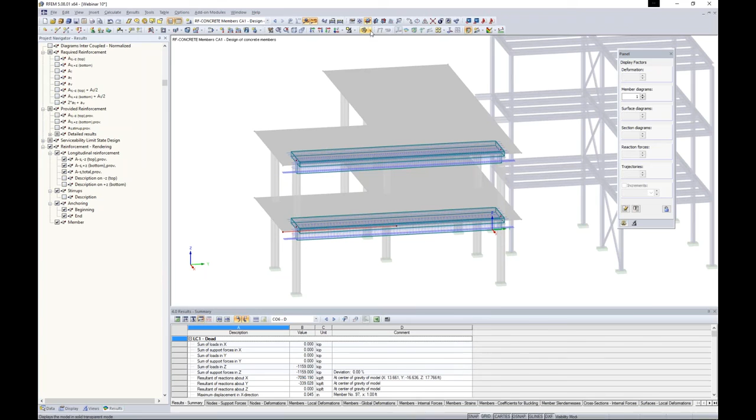So again, breezing through this add-on module, I have an entire previous webinar that I dedicated to only column and beam design for reinforcement. I also did another webinar that was strictly for surface design, reinforcement design according to the ACI, which I would encourage everyone to take a look at if you're more interested in those capabilities.

So the last thing to just show you before I sum up this webinar is our printout report rather quickly. Up here at the top, we can view our printout report, and the program's now cycling through to create that printout report. And what it's going to do is it's going to open up this completely separate application.

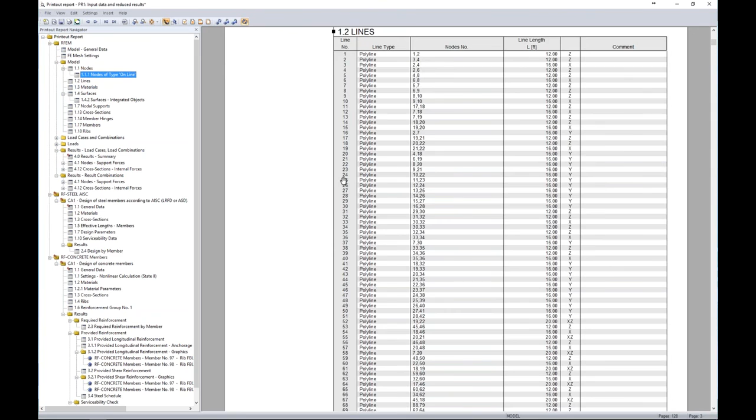I think that our printout report is very, very powerful. You'll notice that we have our table of contents, which looks very similar to our project navigator back in RFEM. As I scroll through these different options here, and maybe I scroll in to view this a little bit closer, well, the program's going to update in my graphical view as I click on my table of contents over here on the left. I think everything is laid out quite nice in terms of the different tables.

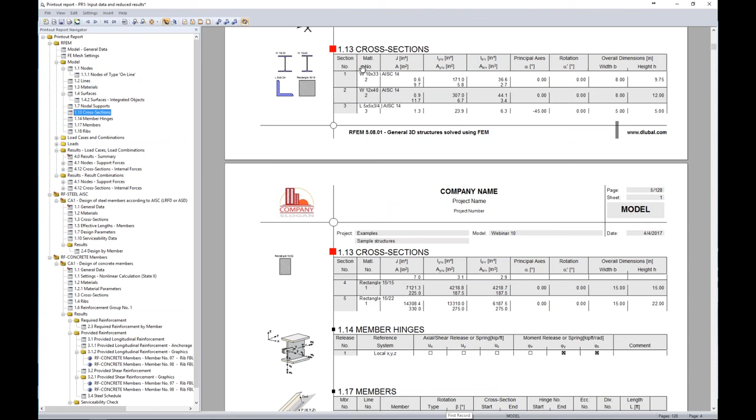For example, if we scroll in here to cross sections, you have a nice little picture showing you all of the different cross sections that were utilized within the program. If we take a look at member hinges, we give you a little picture here so that your engineer reviewing these calculations won't have any question about which axes they released or which they didn't, but with this picture that will be helpful for those review engineers.

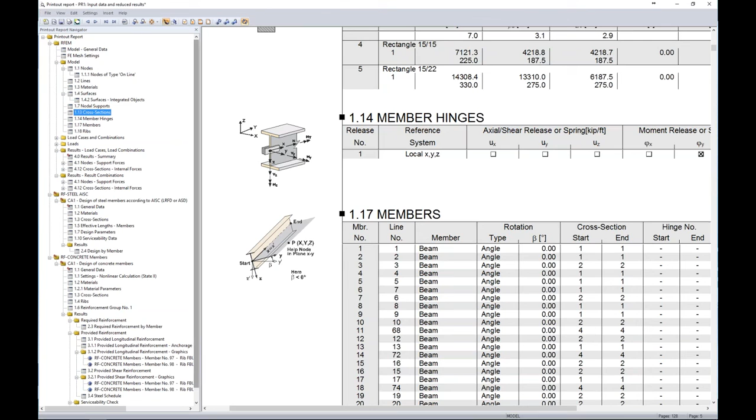We even have our add-on modules located down here on the left, and you can always move around the order of these add-on modules if you'd like to do so. And for our concrete members, we also automatically create a nice picture here of our reinforcement, which is a nice touch as well to the RF-CONCRETE add-on module.

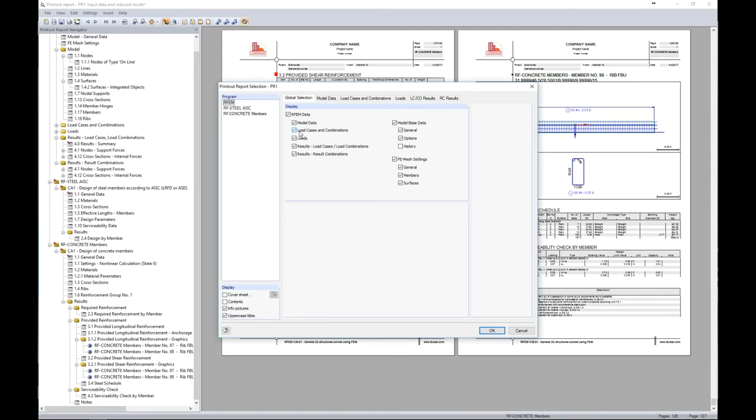So you can add on your company logo here. Very powerful, like I said, and I think it's laid out quite nicely. Under settings, printout report template, under edit selection, we can always control what we are and what we are not seeing within this add-on module.

The last thing to show you is to exit out of this, and of course we always want to add pictures to our add-on module. A nice feature to show you is maybe we select this column line and show our visibility by our selected objects here. I can zoom in, and I'm going to jump to one of my load combinations. Here I'm going to display my support reactions, and I'd like to print off this picture, but I'd like to do it for all of my load combinations.

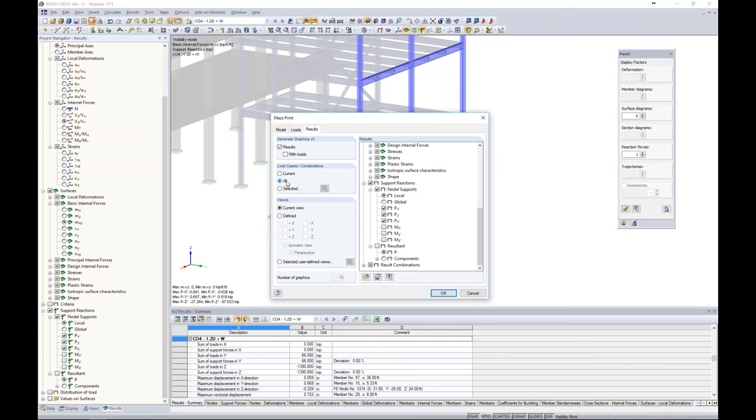Well, we have a nice feature: if I go to this print graphics option up here, we have mass print. Now when I go to the details of my mass print, you'll see we have 3 different tabs here, but right now the program's suspecting that I'd like to view what's already turned on, my support reactions, because that's what I'm viewing graphically in RFEM now. I can choose the option to print off all load cases and combinations at once. So what does this do?

When I click OK, the program's going to take this exact view that I'm looking at and cycle through all of the different load cases, load combinations, and result combinations to show me my support reactions in all of those scenarios. It's going to automatically create those pictures and export them to our printout report, and now you'll notice I have this little list in my table of contents of my support reactions.

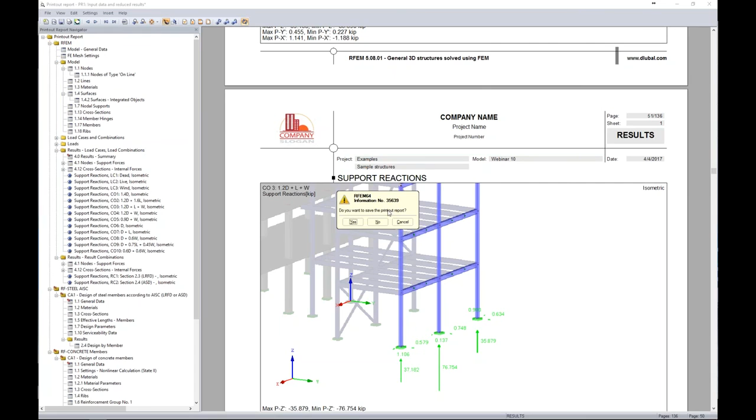If we zoom in, once this loads, you'll notice that as I scroll down through these, I have load combination 1, load combination 2, 3, and all of those support reactions are automatically generated. It's also a nice feature that if I go back and make any changes to RFEM or the add-on modules, basically to the structure in general, these pictures will be automatically updated, so I don't even have to worry about reprinting them. Just another useful feature rather than having to print off each individual picture yourself.

Now we are ready to sum up the webinar today. I know I flew through a lot of that. I just wanted to give our new users a basic introduction to the program and the add-on modules. We have much more information on our website at dlubal.com on both RFEM and the add-on modules.